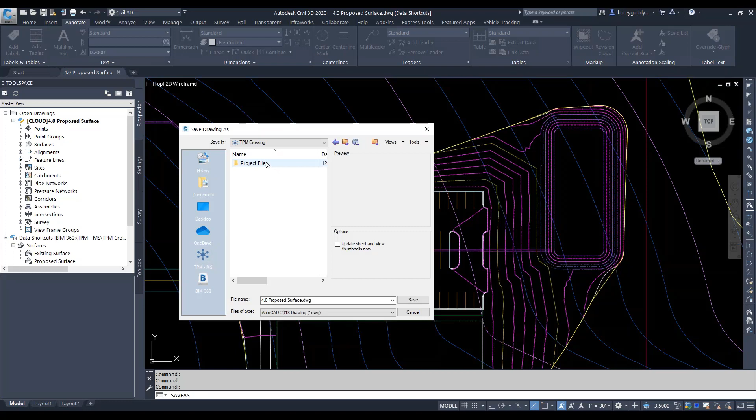So I go to my BIM 360, pick my hub, pick my project, which for me this time was TPM Crossing, project files, and then I could go ahead and save into the civil team - just go ahead and save that file there. Once I save that file, it'll show up back on the cloud on your BIM 360 hub here, in whatever folder you indicate.

Once that file is initially uploaded, you'll see the version - you'll start around version 1. And as I do a save in Civil 3D, if I go here and save, it'll communicate with the desktop connector, which I'll see if I can show you what the desktop connector looks like.

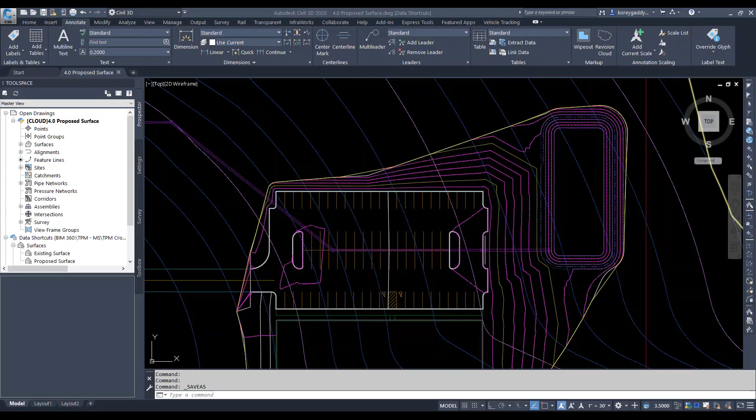Let me share my other monitor here. So on this screen, if I look down at my tray, I have this little white A, that's the desktop connector. If I open it up, it'll show me pending actions. This is communicating back with Civil 3D once I save, and it'll show me the status of that file. Once I save that file on my other screen, I'll end up with a pending action over here in the desktop connector, where I can actually see what's going on with that file. It'll show me if it's been deployed to the web yet or not.

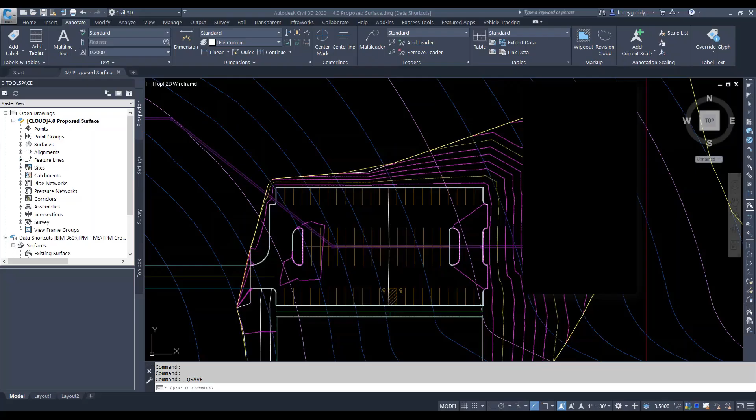In order to get the desktop connector, let me get back to my other screen - you'll have to go on the web and just download the desktop connector from Autodesk. So you can just go and Google desktop connector, Autodesk desktop connector, and go ahead and download that connector, and that'll give you access to that connector.

What you'll notice is once you're actually inside of the file, you'll see over here in your tool space that it actually shows a little cloud. That indicates that this file is indeed in the cloud. It even shows that it's locked by me because I'm working on it - a cloud drawing locked by me. It's showing the BIM 360 location for that file on the left side.

I can also create a data shortcut in the web. So whenever I path to my folder, I can just set a BIM 360 folder as my data shortcut location. So BIM 360 there, and I can go to TPM Crossing and then go ahead and have my data shortcut set up on the web. So I can go ahead and create my folder there through the web and path to that file as my data shortcut.

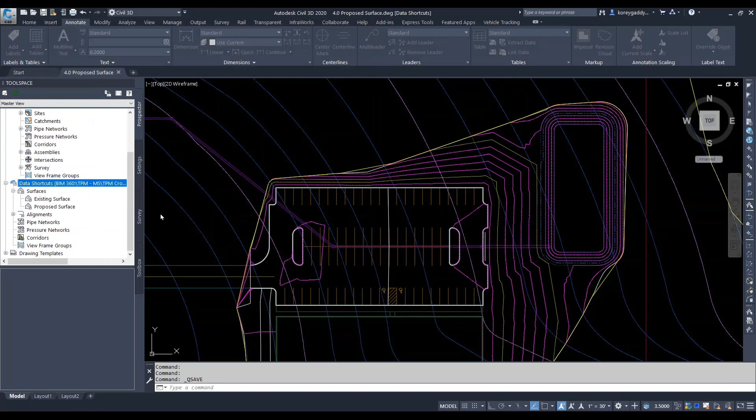And then when you look over here, it actually shows your data shortcuts with the cloud next to it, indicating that it is a data shortcut from the cloud, and it shows you the path for that data shortcut in the cloud. That's the way you would kind of set it up - just go ahead and open up that file, whether it's from scratch where you're first starting that file and go ahead and save it into the cloud, or if you had an existing file that you wanted to save into the cloud, you just go ahead and save it into the cloud and then start working on that file, and then have all your shortcuts and everything path to the cloud.

Same thing applies for your XREFs - you want those XREFs to be in the cloud. Now, the one thing about the XREFs is that it actually doesn't show you whether or not it's actually a cloud file. It doesn't have that little cloud there, but you'd want to go ahead and pull that XREF from the cloud once you got your XREF menu open and path to the XREF. So this XREF here, you can see is actually showing BIM 360 TPM MS - that's where it's found, that's kind of going through the desktop connector. It's letting you know that, hey, it is actually on our hub in the cloud as an XREF.

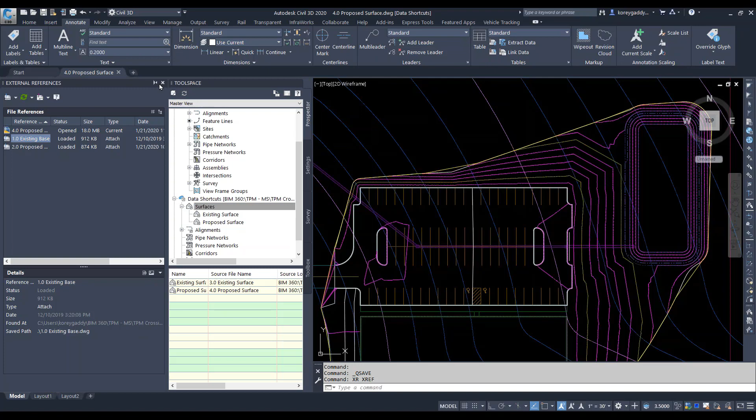The suggestion by Autodesk is that you kind of start the project in the cloud. It's not really suggested that you have an existing file that's been developed in too much detail, and that you try to, after the fact, upload that file to the cloud - you really want to do it at the very beginning of the project. So if you wanted to start working on a project through Collab for Civil, what you would want to do is start on a new project, get all those files set up in the cloud, and work from there. If you try to do it on the back end, it's a little more difficult because you have to repath all your surfaces, all your XREFs, and so that's a little more tedious of a process. So the suggestion is to start on a new project and originate that project sort of in the cloud from the earlier stages to get going.

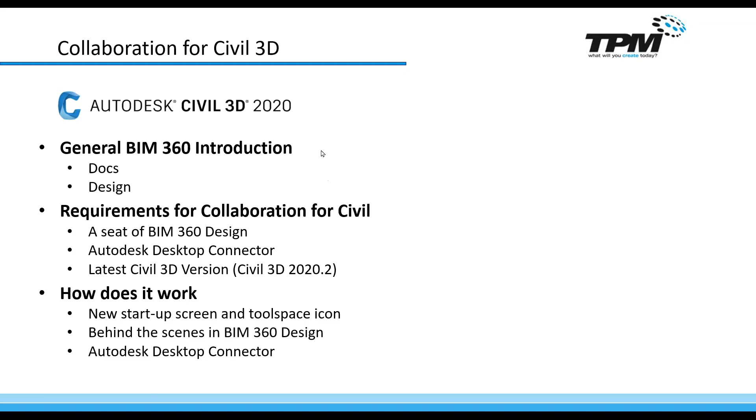So we talked about the desktop connector, making sure you have the latest version, which is Civil 3D 2020.2, the new startup screen and how it looks in tool space. Then we looked into the BIM 360 platform, and we discussed the Autodesk desktop connector. The requirement would be that you acquire a seat of BIM 360 design in order to have access to the connector and to the hub and have it set up in the cloud. So that's pretty much how Civil 3D works with collaboration and the cloud environment, and how things kind of function in the cloud.